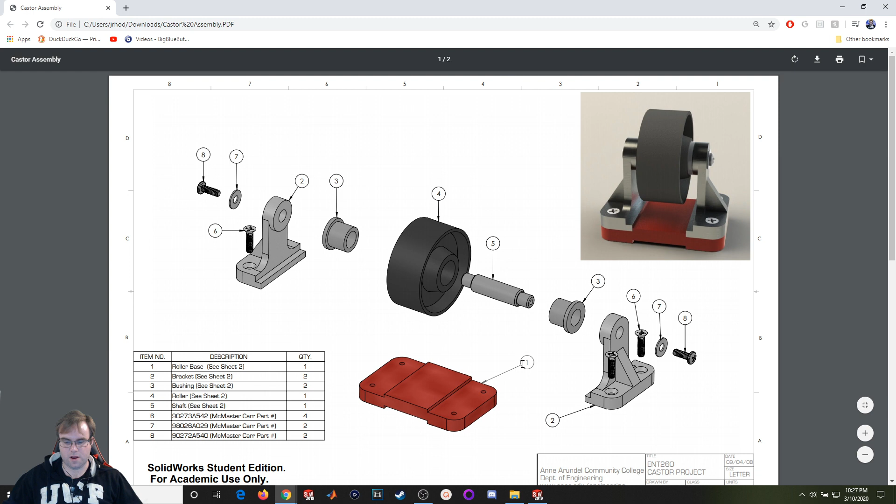For this lecture we're going to build a small caster assembly. If you're in one of my classes, this will be a project you'll have to work on. So here it is in a nutshell: we've got 5 parts you'll have to make, and 3 parts you'll download from McMaster. I've already made and downloaded those parts, so we're going to jump right into building the assembly. I've got a picture of what it looks like fully assembled, an exploded view, and each part called out on this first page. On the second page, for those who haven't made the parts, you'll have all the dimensions you need.

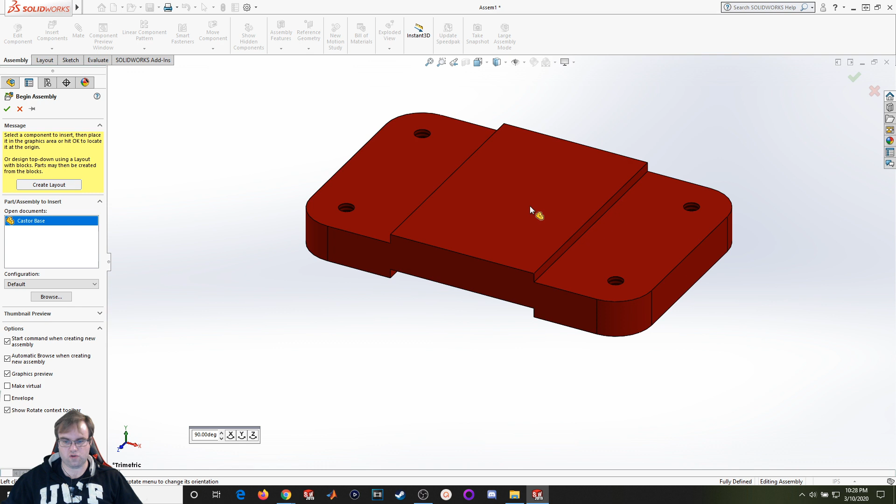Let's go ahead and open up a new assembly. Now I'm going to bring in the base as my first part and drop it into the workspace. I see it's fixed in space — the first part you bring into an assembly is fixed immediately.

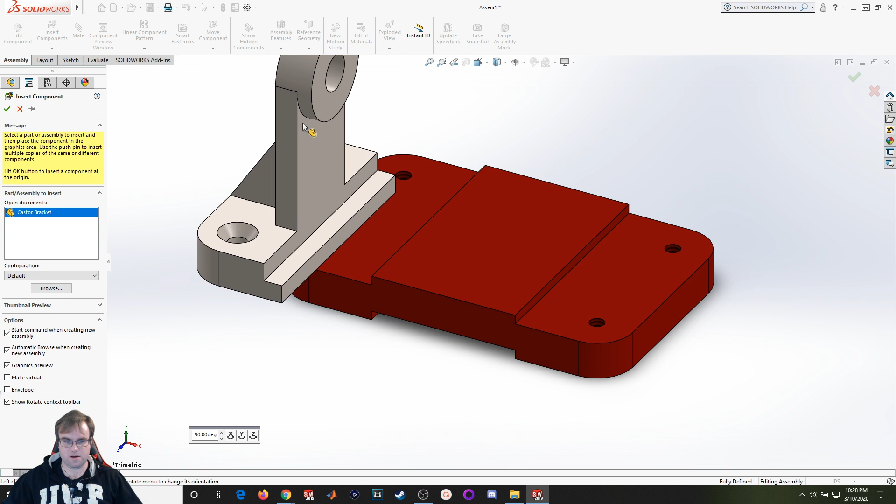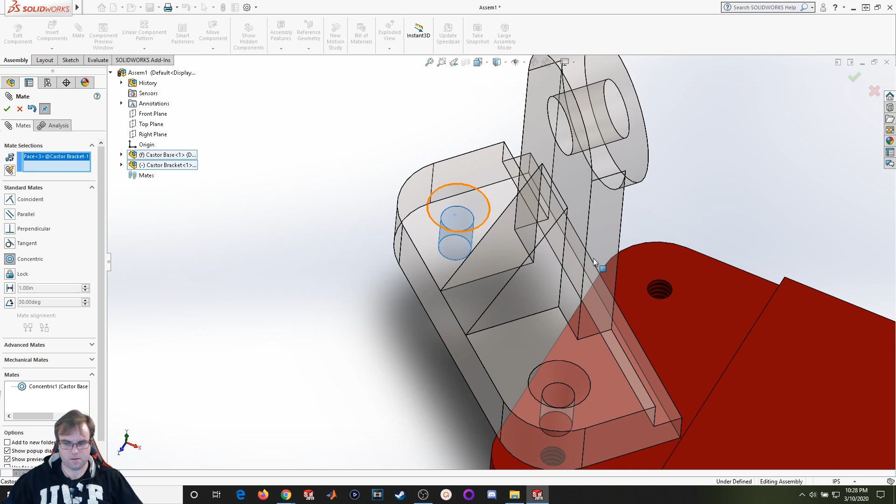Now I'm going to bring in my next part, a bracket. I'll go to Insert Components and bring in a bracket, dropping it in space. I'll mate it: concentric on that surface and this surface, pull it up like so, concentric again on that surface, and coincident on that surface and that surface. Alright, that's the first part.

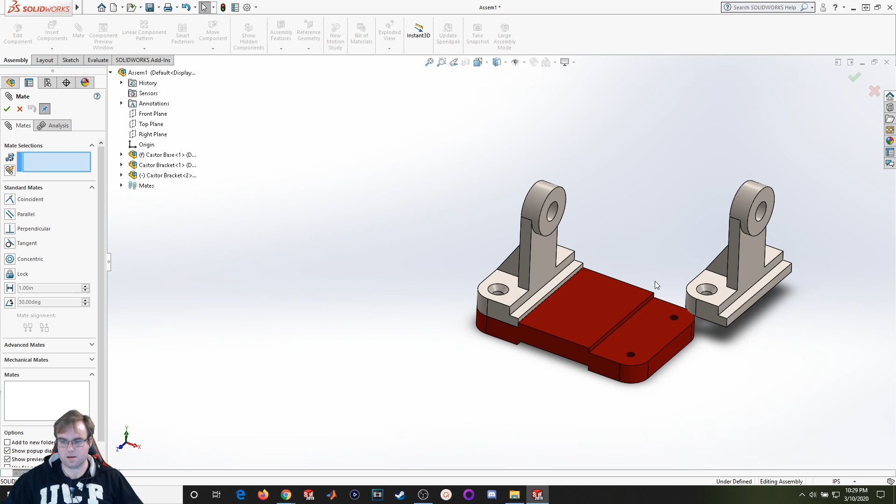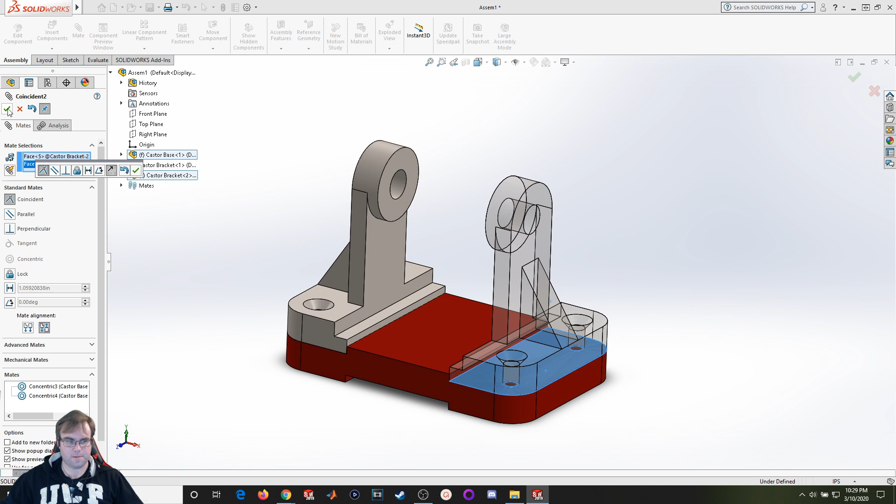I'm going to bring in another component, another bracket, and drop it in. I'll mate it on that surface, rotate it to get it in line the way I want, then mate that surface and that surface. Alright, so now I've got my two brackets.

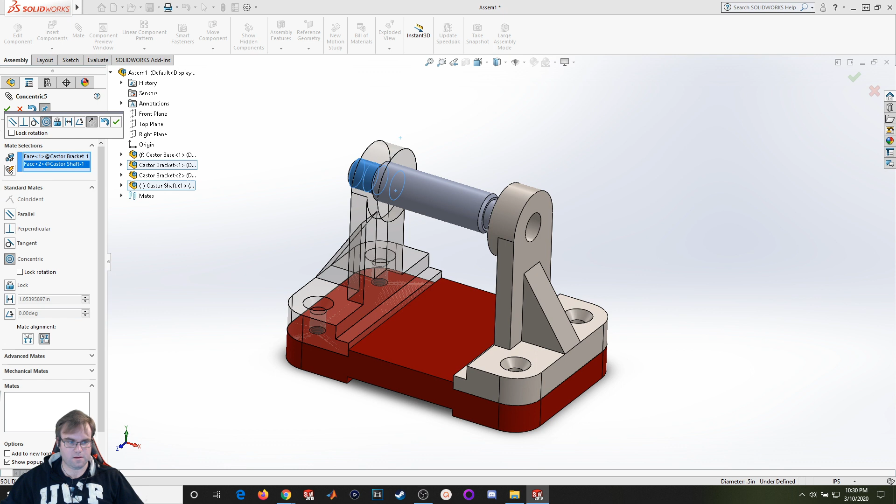Now I'm going to bring in the shaft. Insert components, shaft, and put in a concentric mate. Now it's free to move about, but I want to lock it in so it's equally spaced. So I'll introduce a new mate — we'll go over this more in later lectures — it's called the width mate, under the advanced mate tabs. It lets you pick four surfaces and equally space them apart from each other. Let's go over this.

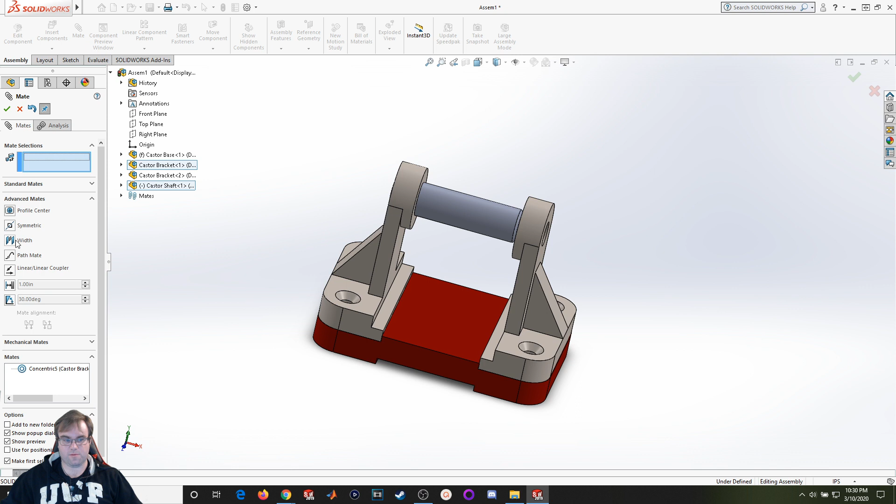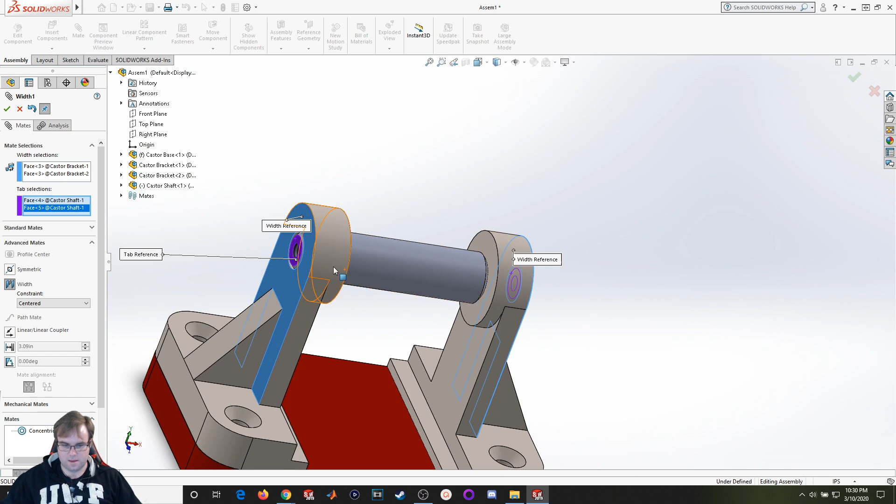For my width selection, I'll select this face and this face, and as the tab I'll select this face and this face. It will put equal distance between each other. It doesn't matter which you use as width or tab, you just have to make sure that if this is your tab, this side also has to be the tab, or if you want to make this the width, this would also have to be the width selection. I'll hit OK.

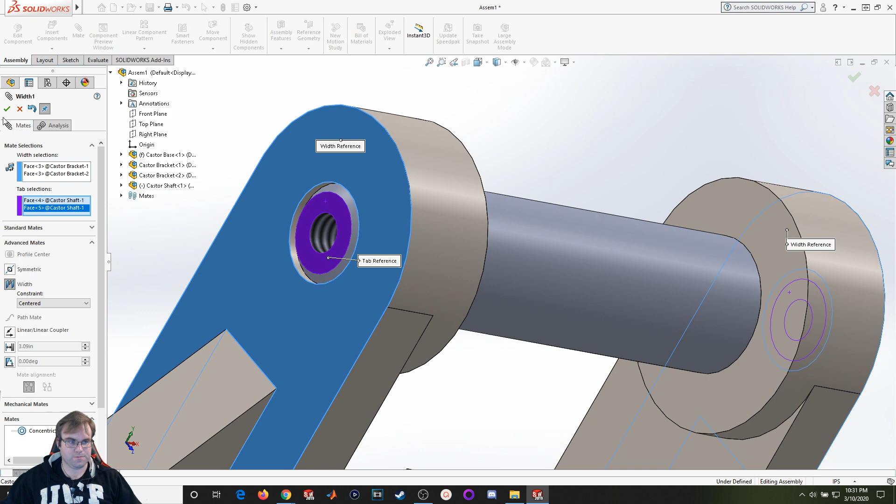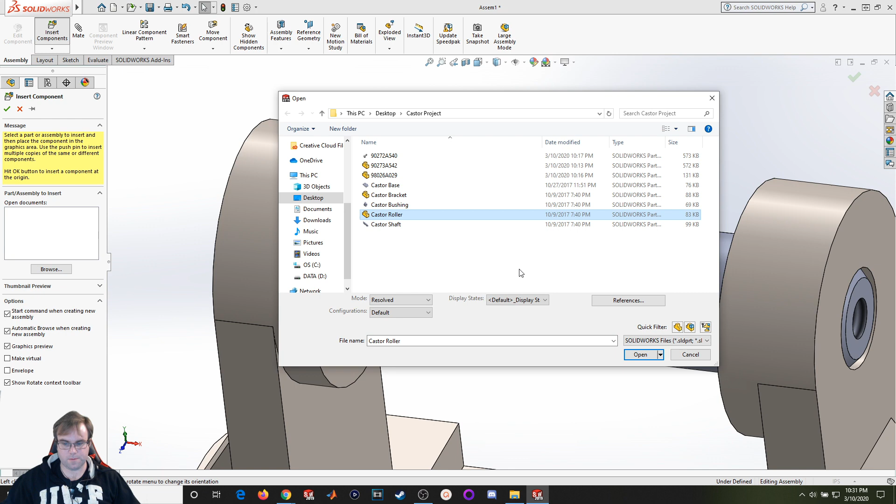Now I'm going to bring in another part — let's bring in the wheel. Insert component, and that's the roller. I'll mate it like so. Now I'm going to bring in the bushings.

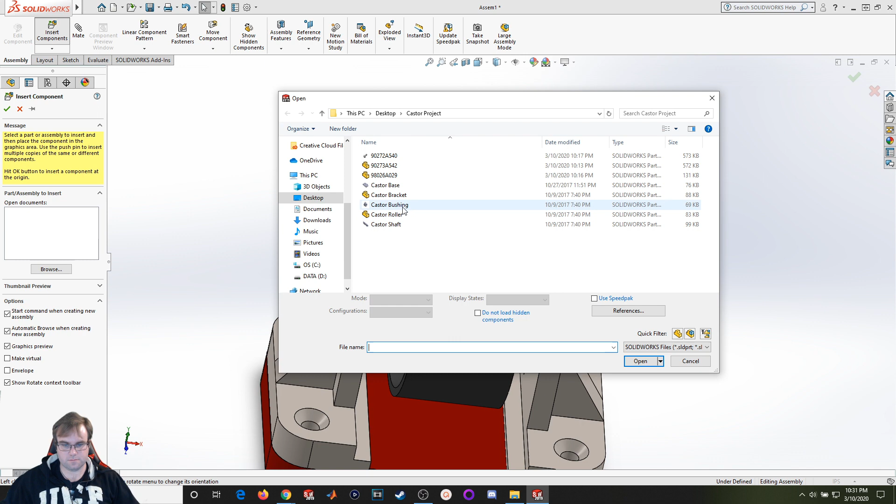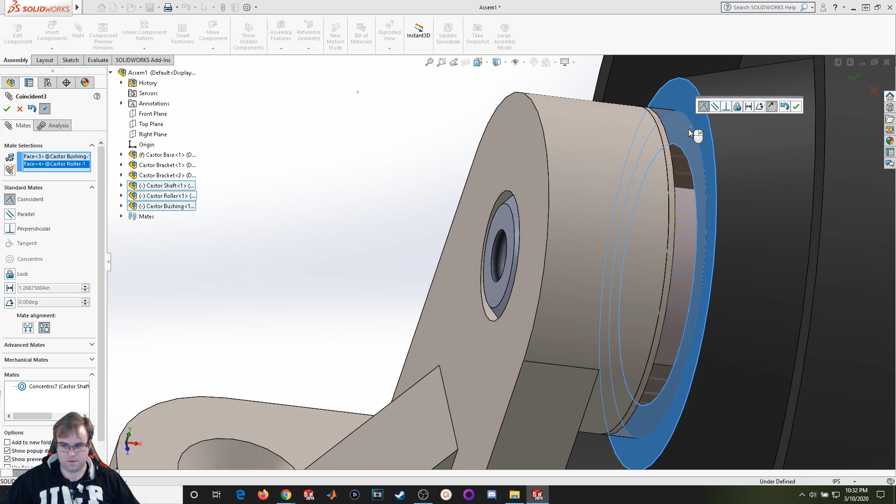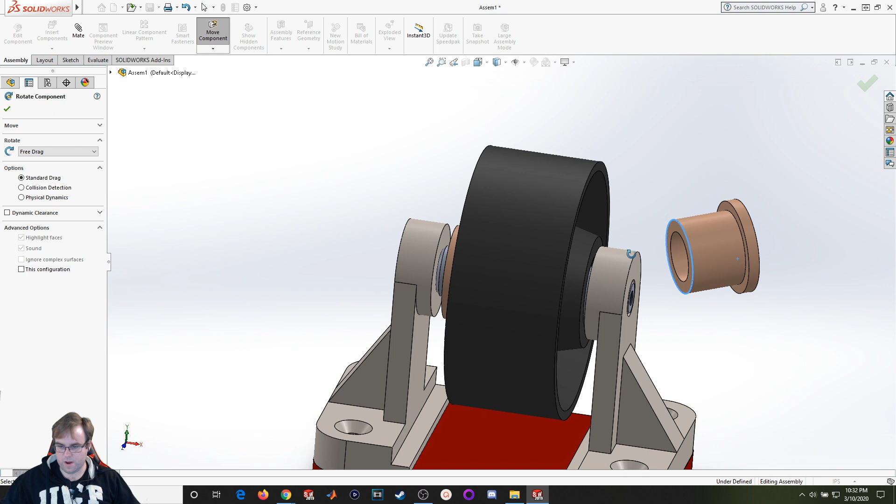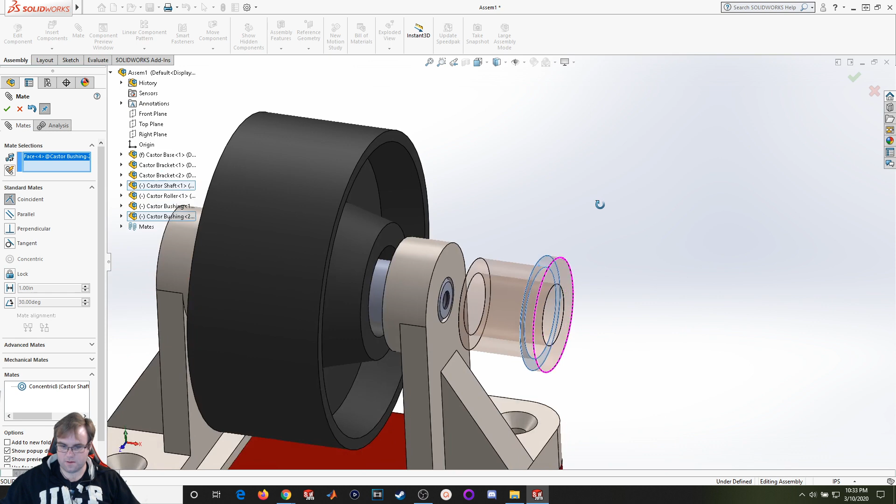I'll mate this surface and that surface, then make this surface and this surface coincident, like so. I'll do the same thing for the other side, rotating it to get it in the orientation I want, moving it over, and mating: concentric, then coincident on this surface and this surface.

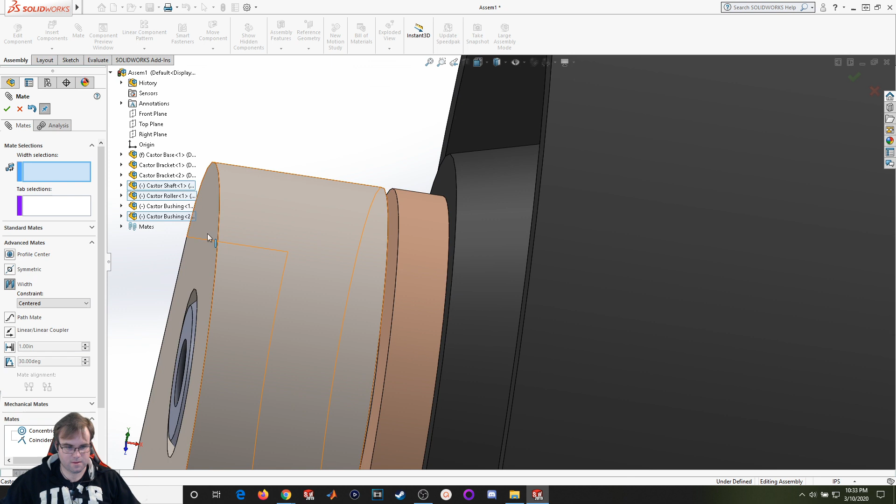Now I'm going to put in another width mate. Advanced mates, width, and I'll select this face and this face as my tab, then select this and this. That should equally space my wheel.

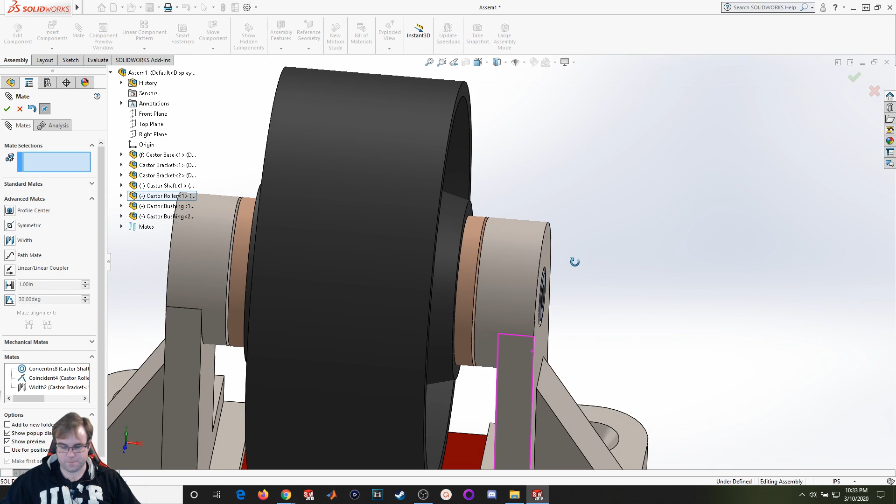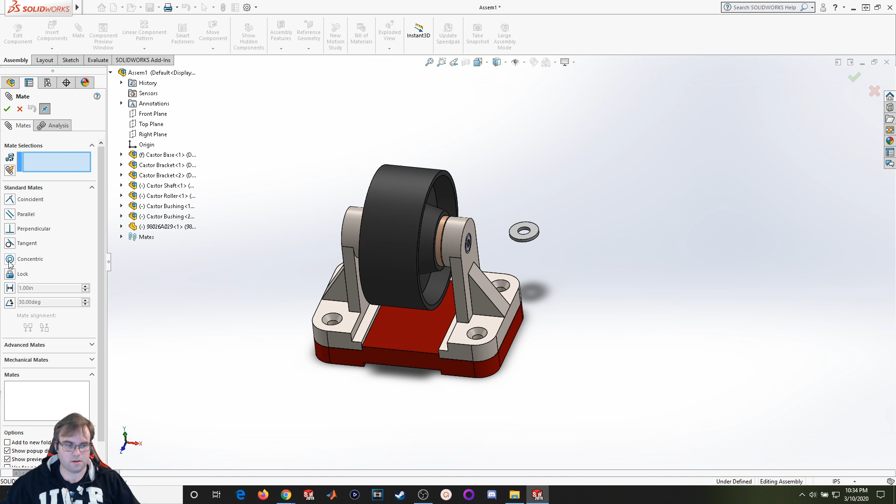Now I'm going to bring in the washer. Insert components — the washer is number 7, that's A029, this one. I'll mate it, grabbing just the edge for that one, then this and this one, like so. I'll do the same thing for the other side.

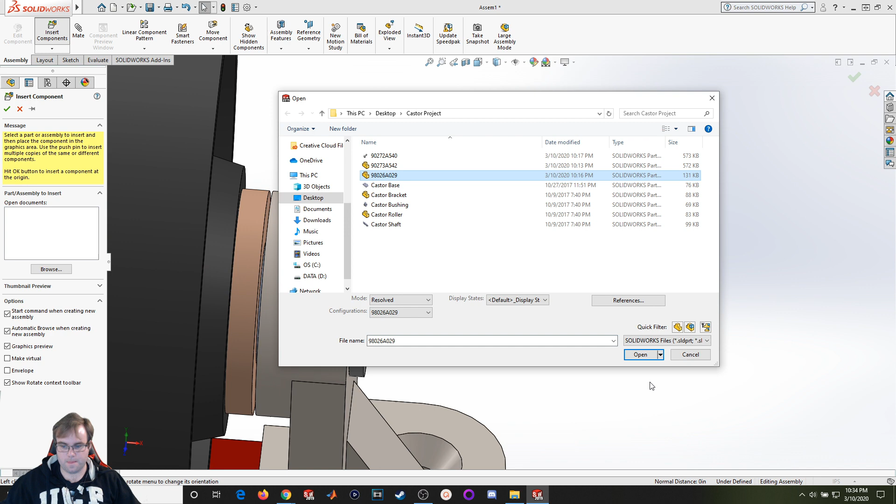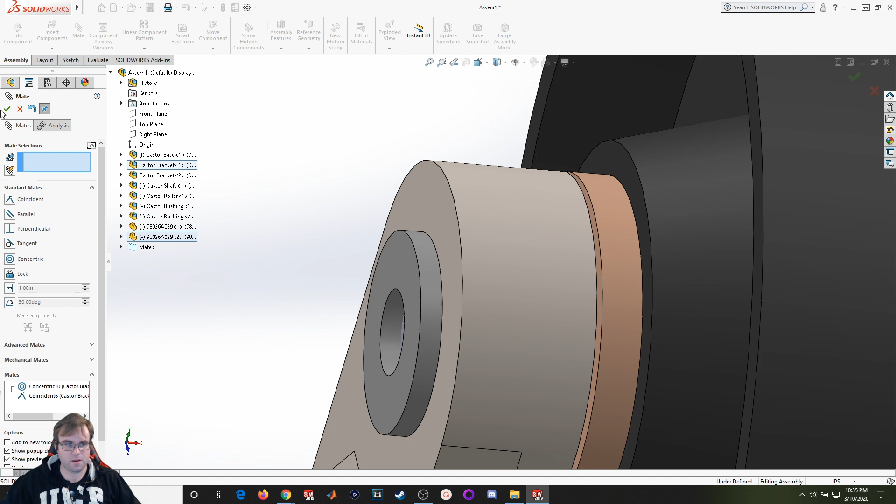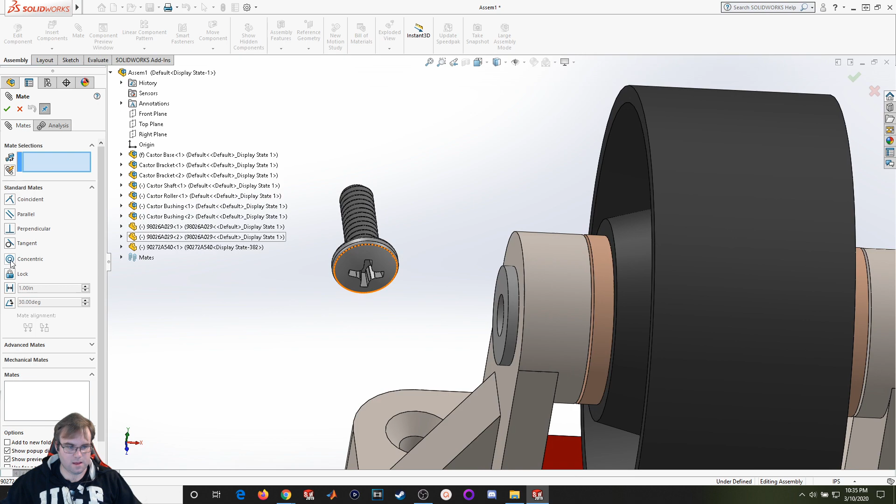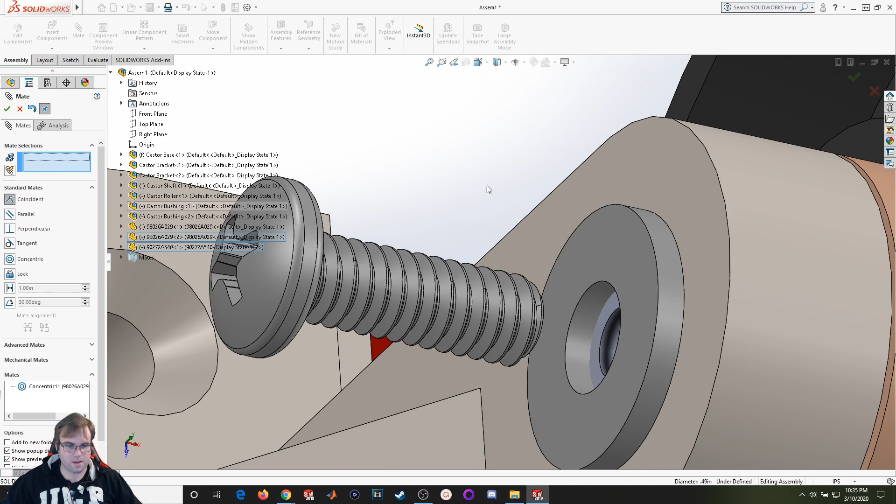Now I'm going to bring in the Phillips head screw, which is number 8, that's 540. It's got some sketch entities I'm going to hide, so I'll uncheck the sketch. Let's add a concentric mate — for a threaded screw, it's easiest to find a smooth rounded surface since it's hard to mate with the threads. I'll click on this surface to put the concentric mate in, making that and that concentric, then this and this coincident, like so. I'll do the same thing for this side — that was 540.

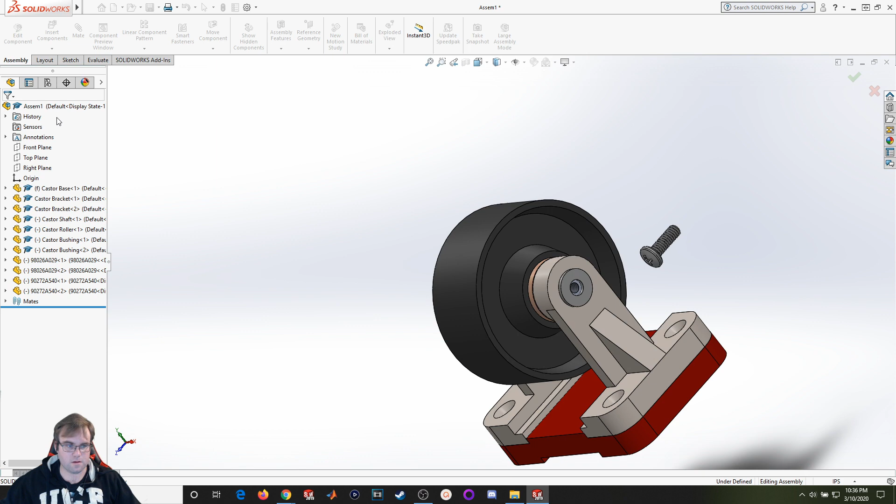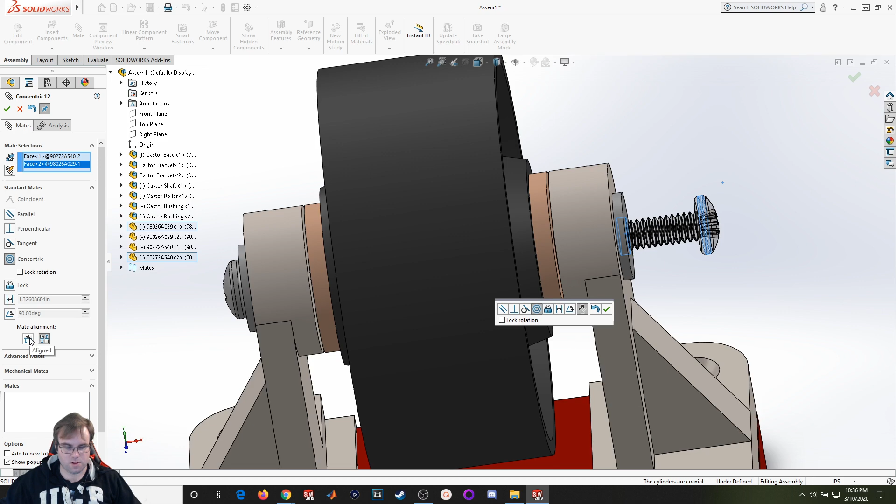Sometimes when you do a concentric mate, you might have to flip it, so you can click Flip here to flip the orientation of the screw. I'll hit OK and add in a coincident mate, this surface and this surface.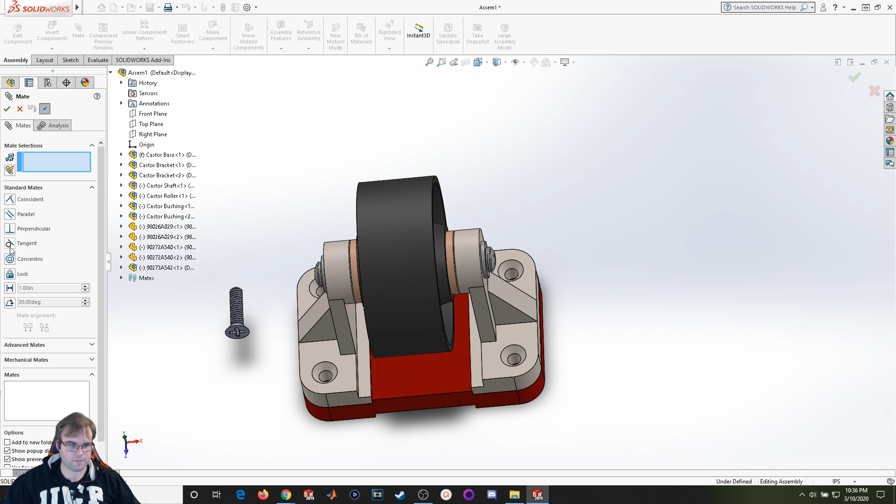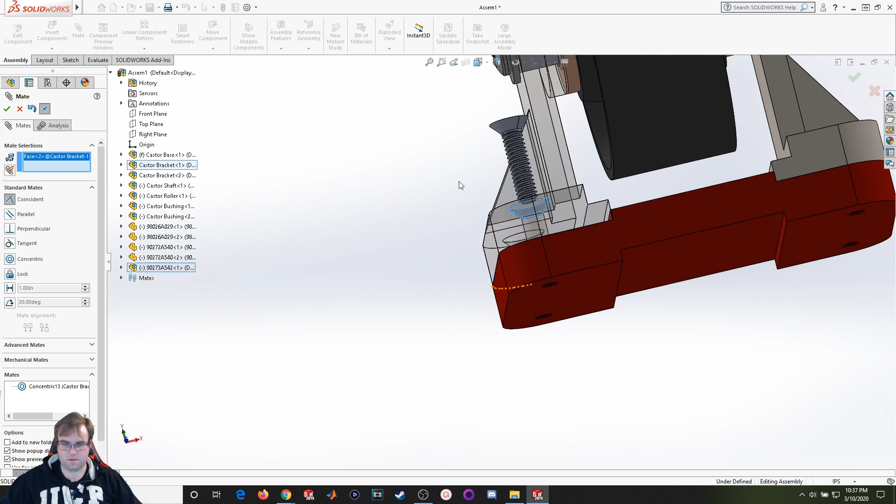Alright, the last part I've got is to put in the flathead screws. Mate, concentric — I'll grab the edge, like so, and make it go coincident with this surface. Well, no, it's coming all the way through — I'll try this surface and this surface instead. To undo, I just hit Control-Z, just like doing a sketch.

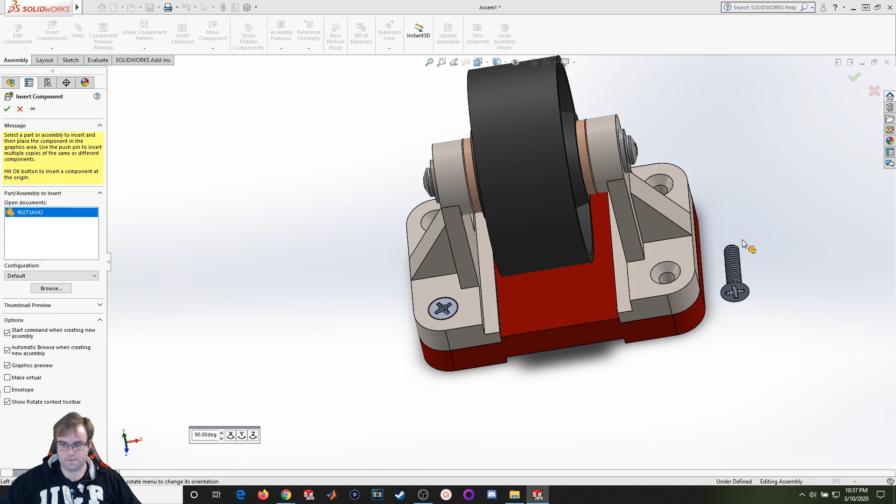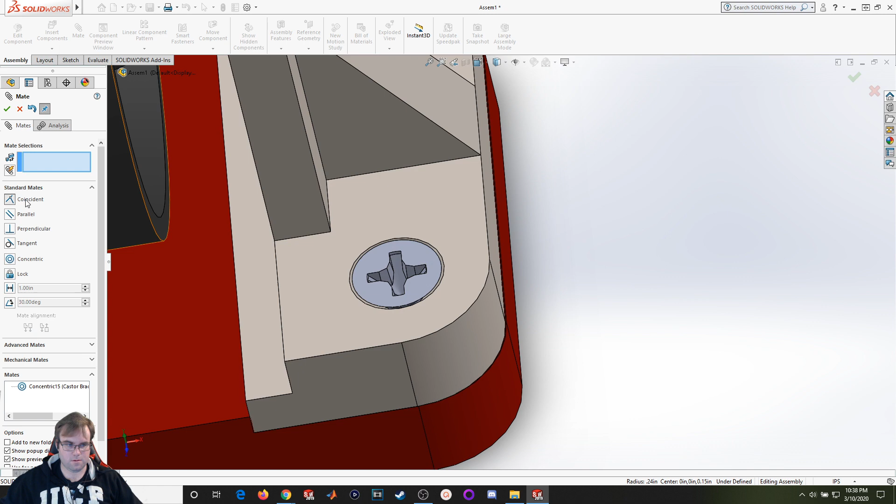I'm going to insert a couple more of these, and then we'll be done. Getting the edge... concentric.

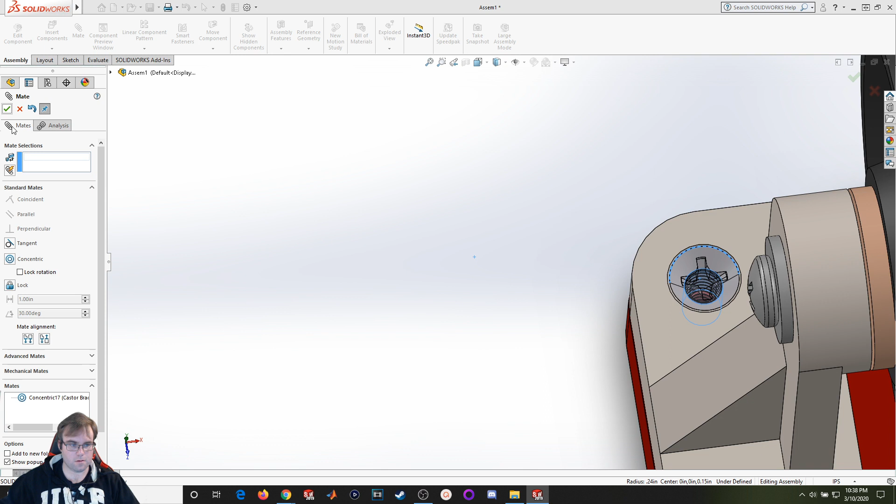And there we go — we have our completed Castor.